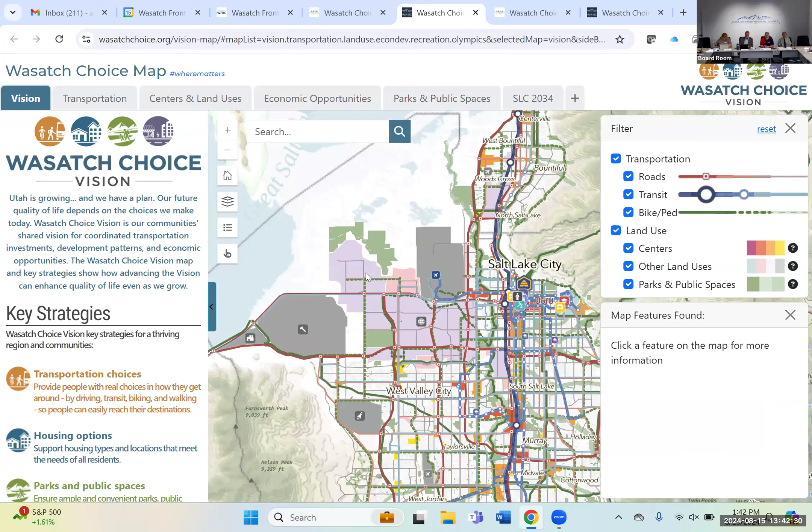But we also created this tab, the SLC 2034 tab, and now this is available for all of you to check out. If you look at this, it shows the locations of the Olympic venues all over the region—the venues in Salt Lake, those over in Park City, further north at Snow Basin, and down into Provo for the hockey arena.

The proximity of venues to our central core is narrower than really any other Olympics that's happened, as far as I'm aware. One of the reasons our region was selected for the Olympics is because we have the infrastructure largely in place to serve the Olympics when they're coming.

Now some of that is based on what we did in 2002. But the question is, what's happened since 2002 and what's going to happen between now and 2034? So what I'm going to do, and you can do this too on the map, is turn off all those transportation layers. You'll see the venues are still showing up, along with a few major developments we're anticipating in our region.

These are really important major regional developments—the Point, downtown Daybreak, the Fair Park and the Power District, the Sports and Entertainment District—that we also think about for access.

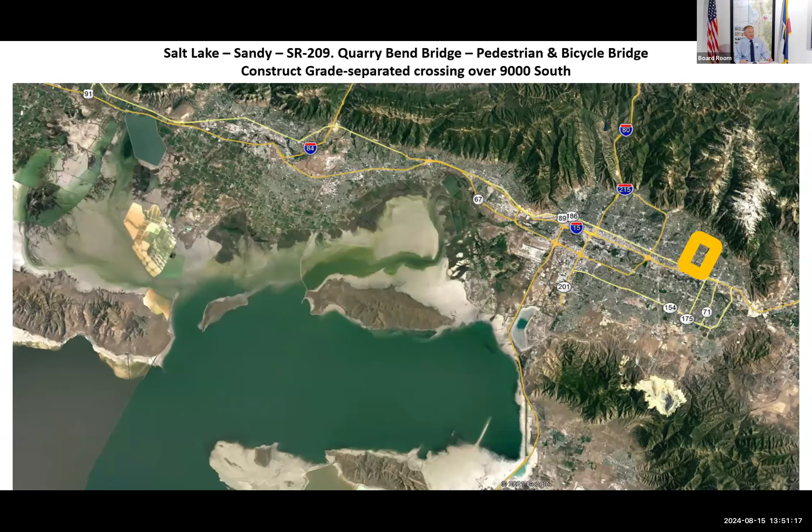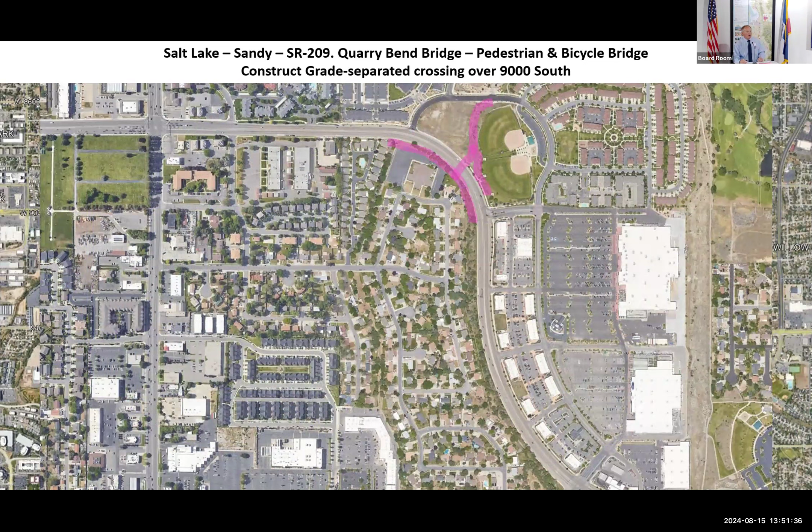So our very first project that we'll look at here is in Sandy City. This is in Salt Lake County, on SR 209 or 90th South. It takes place here at Quarry Bend, where it takes a bend right here, 90th South, over towards 9070 South. The intent is to build a pedestrian bicycle overpass or bridge over 90th South. This is a grade-separated facility—you can see it there in the dark gray.

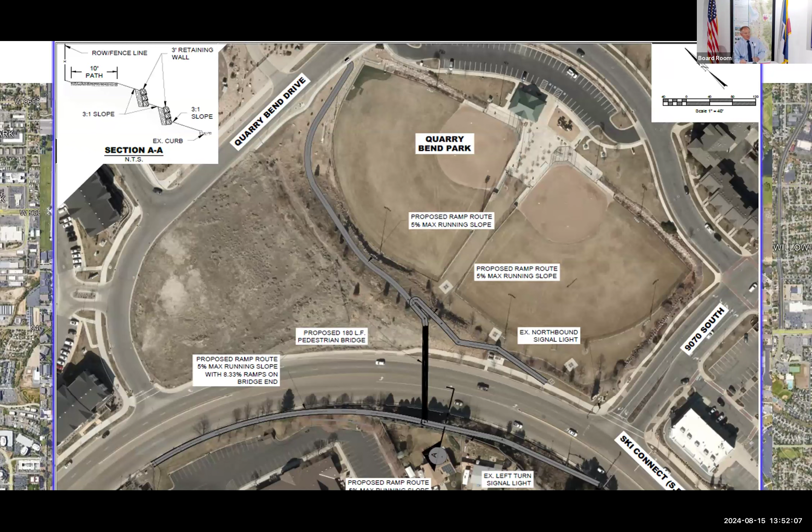What it'll do is not only construct the bridge, which is the black line, but also the sidewalks, which will enable a connection to their Sandy City Canal trail, as well as sidewalk. It'll provide access from the residents on the west to proceed across to where the recreational and shopping facilities are on the east. You can see the grade elevation between the west and east side there.

The structure is fairly simple to implement, but the intent of this board modification is to add additional funds. There were some active transportation investment funds that were programmed by the department on this project.

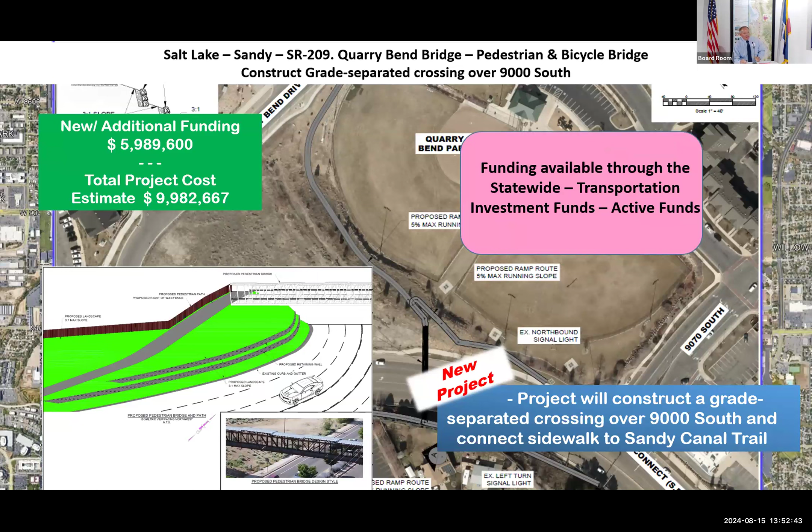This amount was for $5.98+ million, giving us a total project cost of $9.9 million for this project. The next project we have an opportunity to look at is just south of the Capitol, on Capitol Hill at 300 North and State Street. This is to address an intersection there, realigning an existing at-grade intersection into a roundabout at 300 North and State Street. Perhaps this is the view you're more familiar with. The construction of a roundabout in this area will reduce congestion and help increase safety and mobility throughout the area. There was some funding put into the design, $300,000. An additional $2.2+ million is being requested to add to this project so it can go to construction.

The next project we have before us is also in Salt Lake City.

On the last one, does that mean we lose the possibility of death during the legislative session if they build this? Because that's the most dangerous intersection in the world to get through, and you have to have a lot of courage. You mean it's going to solve that issue?

I would defer back to UDOT. I think it's a good thing—it'll minimize the speeds and the intersection organization, I think. Ben, anything you'd add? Coming up out of the avenues onto Beck Street may be as bad as that one. I know that they've done a lot of coordination. It just shows you should not try to go to the Capitol during the legislative session.

I know that they've done a lot of coordination in that area, and I think one of the things they're also looking at with this project is they've had issues with people trying to get photographs and stepping out into the roadway to get the right photograph. Part of this creates a little bit of extra room to allow for those activities to happen off the roadway, so that's also part of it.

Our next project is a project in Cottonwood Heights. This is a request from Cottonwood Heights, at the Bengal Boulevard and Highland Drive area. It's an intersection improvement in this particular location. You'll recall, hopefully, that a few years ago we had this project brought before this body for review and approval. This was to address the intersection at Highland Drive and Bengal Boulevard, both the turning movements to the north and to the south.

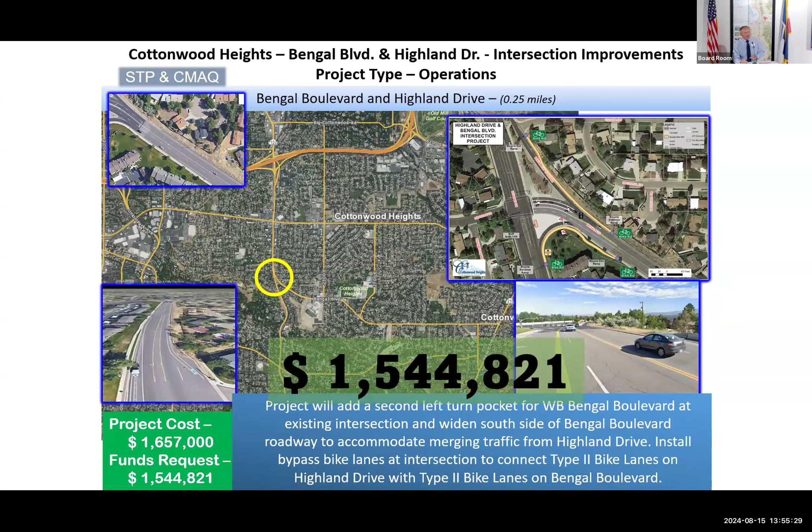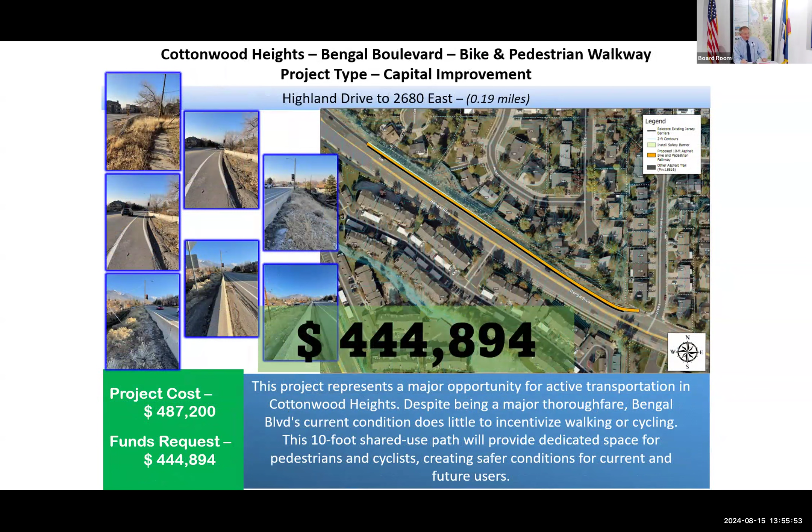A couple of years ago, the funds recommended by this body were $1.5+ million. There was also a project just a little to the north and further east on Bengal Boulevard, to construct a 10-foot bike-ped path on the north side of this facility. The intent was to tie these two projects together. It was recommended by this body and approved by the council, at $444,000.

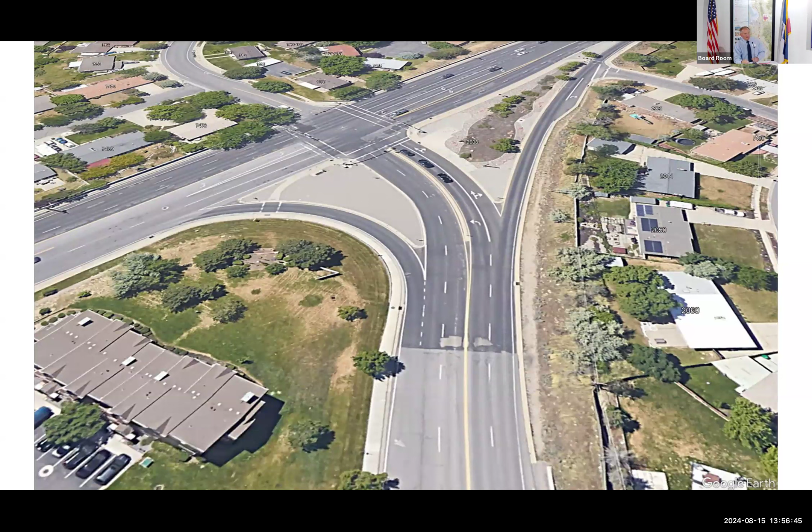But as you proceed a little further to the west, we lose all that on the north side. And as you come down to an already constricted intersection approaching Highland Drive, we have even more complications with the level of traffic volumes in the area and the pedestrian mix.

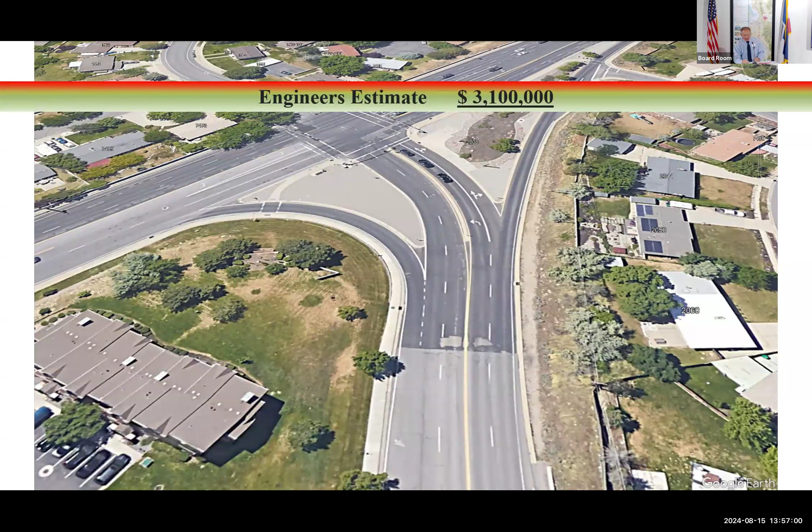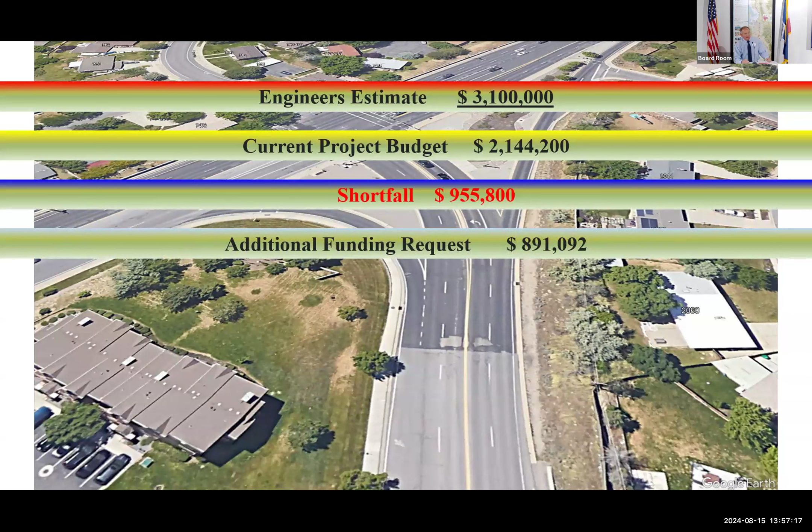As we combine these projects together, the engineers, having gone through 30% design, have identified that this project is now a $3.1 million project. Our funding currently budgeted or programmed for is $2.1+ million, giving us just under a $1 million shortfall. The city has come back and requested an additional $891,000+, coming to the table with their match, as well as a commitment to provide all other resources and additional funding if necessary to complete the project.

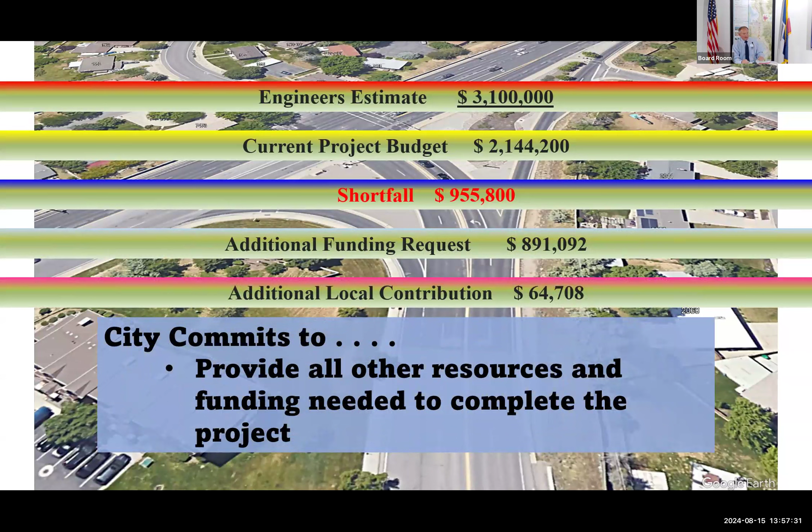So this board request is for an additional $891,000 of STP funds.

The next project brings us the list of Transit Transportation Investment Fund first last mile projects. This is a funding source for active transportation projects, to help address transit use, either from home, work, or other locations.

As the Transportation Commission, UDOT has a prioritization process for these projects. And when a project is identified, it requires that the project sponsor come to the table with at least 30% match on the project funds.

These projects were reviewed over this past 6 months, in March and May, and then were approved by the Transportation Commission. These projects here are projects that are in the WFRC area.

That's pretty good. So that gives us a total amount of projects in the Wasatch Front area out of 13 projects, 12 of those projects are in the Wasatch Front area. The total funds that were programmed with the match equated to more than $22 million for all 13 projects.

The TTIF first last mile projects equated to $4.7 million. In the Wasatch Front area, the total amount of the projects was $21+ million on 12 projects, with the TTIF first last mile at $4.4 million.

So the request is to add these projects into the Transportation Improvement Program. That brings us to table number 2.

So the first projects in that table are projects from our federal government. These are grants for community project funding, or CPF projects. They were formerly known as earmark projects.

These projects are appropriated and allocated from the general funds for transportation and infrastructure, and the grants are based on the recipients, and their allocations are determined by Congress through a congressionally directed application process. The recipients are also specifically identified in the Appropriations Act corresponding with the applicable fiscal year.

Awesome, that's fantastic. So they're sending us money and telling us where to spend it. So we say, why do we need to talk about it? Well, we need to, as a body, approve these projects into the TIP.

Some of these projects also have funds that are already in the TIP. And so if we were just to add those funds to the projects that are already in the TIP, there would be some discrepancies in the amounts that are coming to the state from those that they could see and those that they couldn't see.

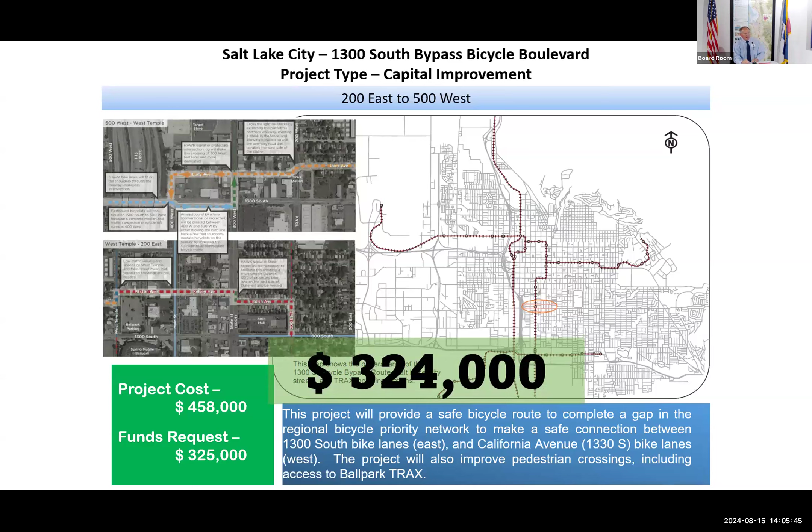It was requested that we fund the project at the time for $325,000, and Transcom recommended, and it was approved at $324,000.

In addition, a couple of years ago, Salt Lake City came and said that for phase one they would like to construct the Kensington East-West Byway, which was also a bike-ped improvement in the area of West Temple to 6th East. This body reviewed and recommended it, and at the time we had $300,000 to put towards this project, with the commitment from the city that they would secure additional funds from another source.

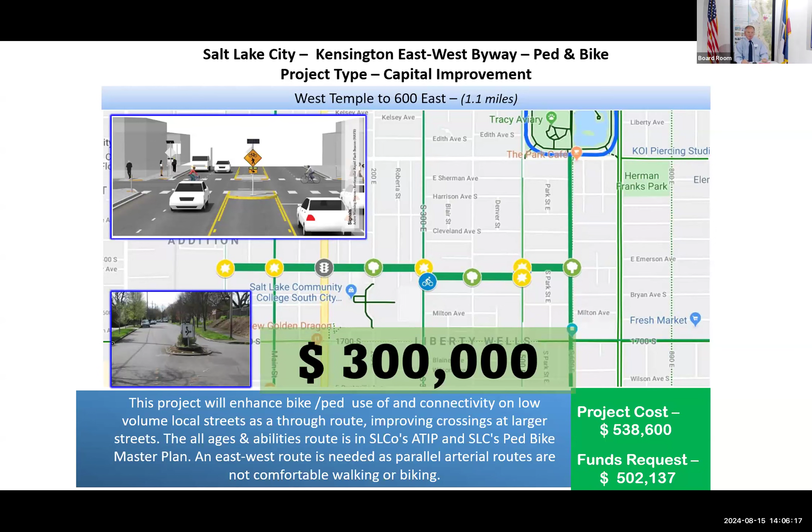The following year, they came and requested phase two of this project, again the Kensington East-West Byway, improving and enhancing the bike-ped facilities throughout the communities on lower volume roads. The requested amount was $410,000, and Transcom reviewed and approved $350,000 for this project.

So these three projects were out and going. There were parts that were done on the 13th South project—the very first one we did—that were outside of the federal project. They were able to accomplish some tasks with UTA and in-house that didn't require any federal action or oversight.

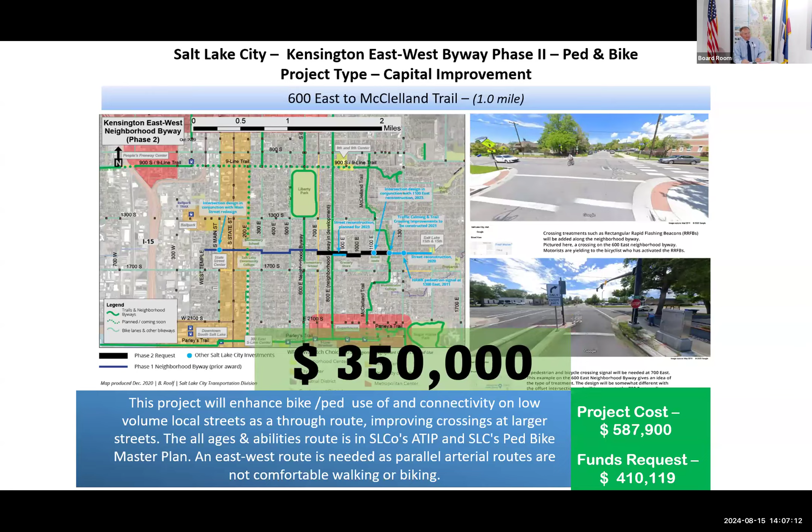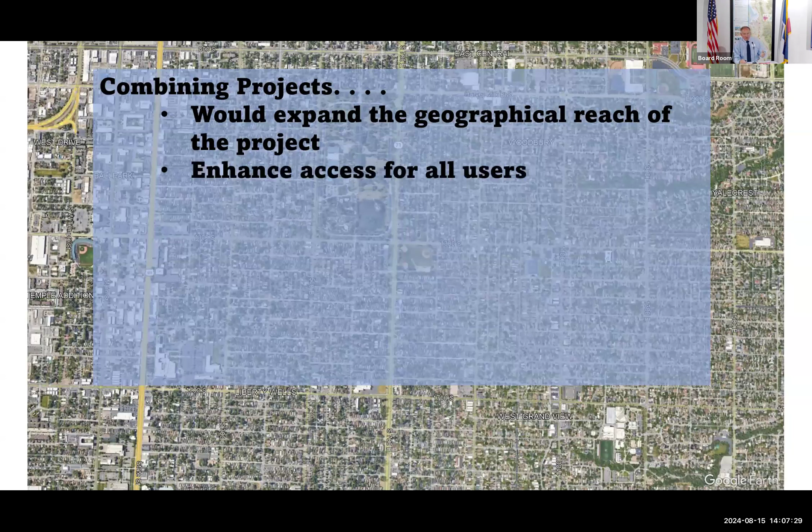So the request now, after counseling and working with the city, is to combine all three projects together, combining all their funding to make an improvement. This would expand the geographical reach of the project and enhance access for all users, especially bike and pedestrian users. It would add key bicycle infrastructure along 13th South, Kensington, and Andrew Avenue.

It would include critical intersection safety improvements on Main Street, State Street, and 300 East, and implement traffic calming as well as signing, striping, and pavement markings. If we add those three projects up, the total amount would be a little more than $1 million. The request is to combine those projects, expand the scope, and dovetail the improvements together to get the most out of the funds available.

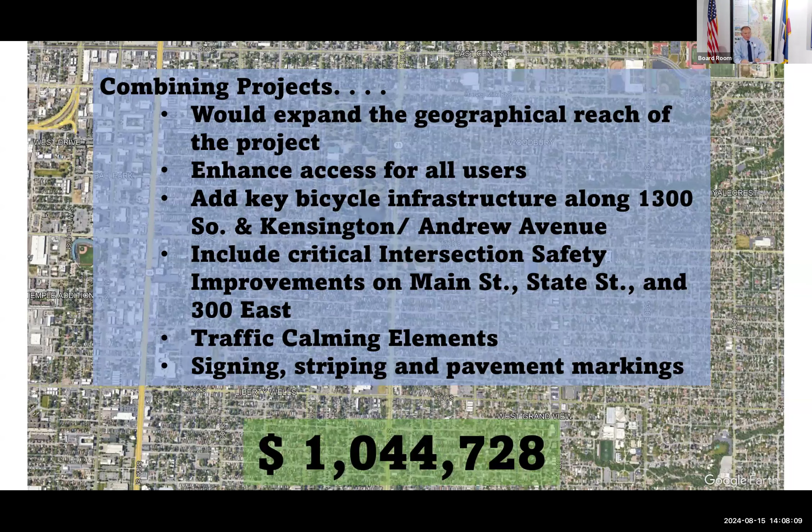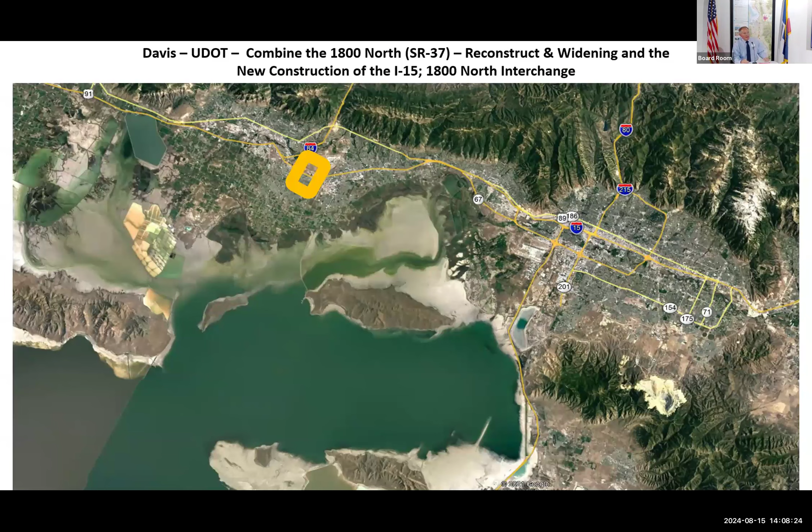That brings us to the third sheet. The first project here is on UDOT—this is the combination of 1800 North and the new construction of an interchange on I-15 at 1800 North, in this location right there.

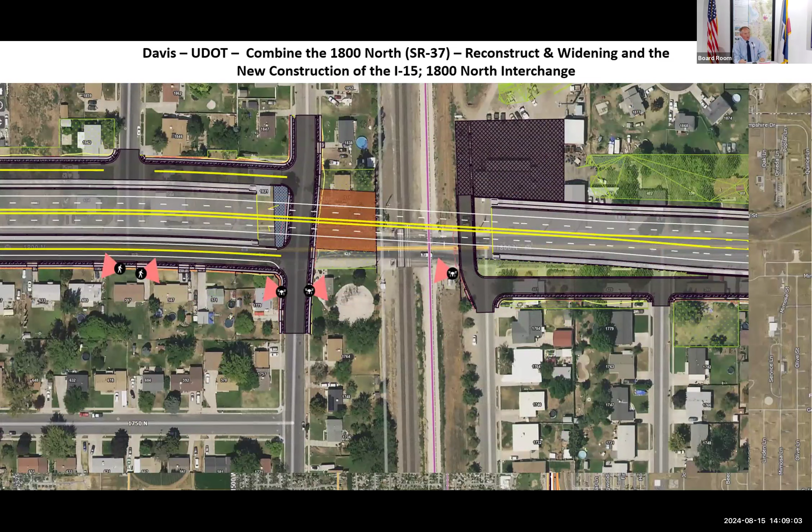The intent of this project is, on 1800 North, to take this facility—let me zoom back just a second—which is a two-lane section of road through this area with an at-grade railroad crossing, and construct a five-lane facility, including a bridge over the rail tracks. That would require additional frontage roads and improvements along the facility and corridor.

You can see also improvements up to the 1900 West intersection there.

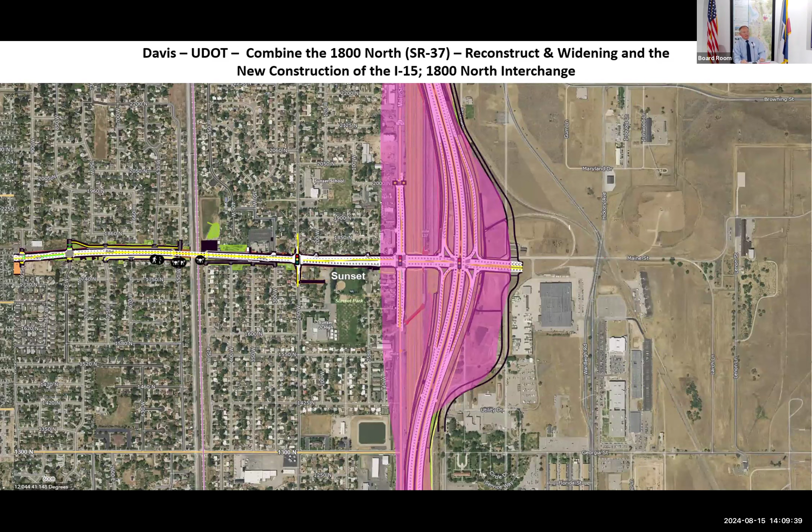On the freeway side, it would take the interchange and construct a new interchange, but push I-15 to the east onto property currently owned by Hill Air Force Base. UDOT and Hill Air Force Base are in discussions right now. Preliminary work has been done, the rail that was there has been removed, with the intent of purchasing that land. With this particular structure, you can see the intricacies involved.

That by itself looks amazing, doesn't it? This particular project will also include trail systems through Clinton, through Sunset, and along Hillfield Road. Maybe you've heard of 3-Gate Trail, improvements along those are also included in this project.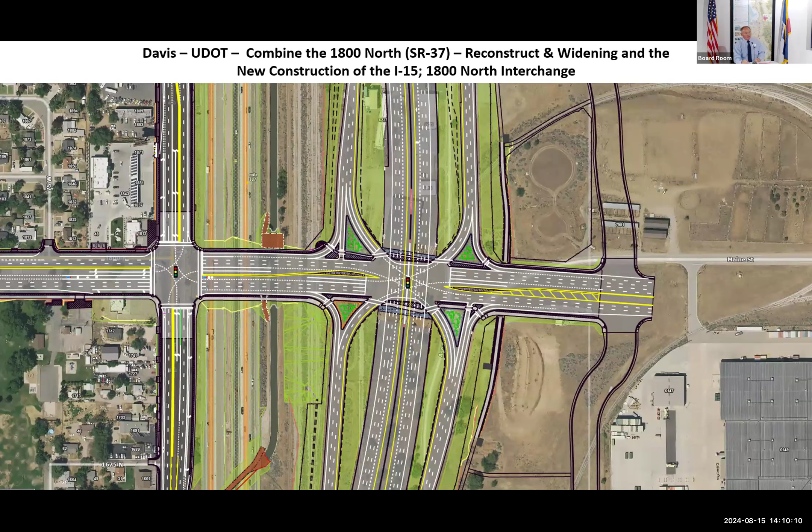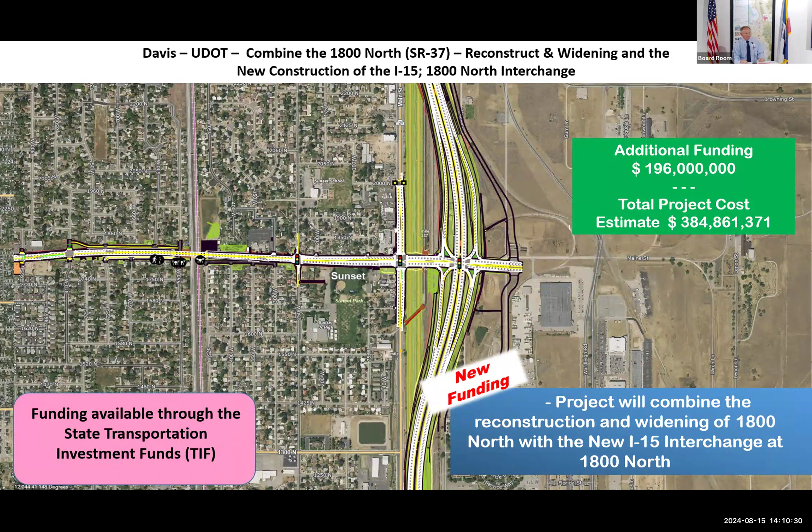The intent is to tie these two projects together, bringing additional funds to the project. We're bringing an additional $196 million, giving us a total estimated project cost of a little more than $384 million. The next project we'll look at is on I-15 Shepard Lane interchange and pedestrian overpass.

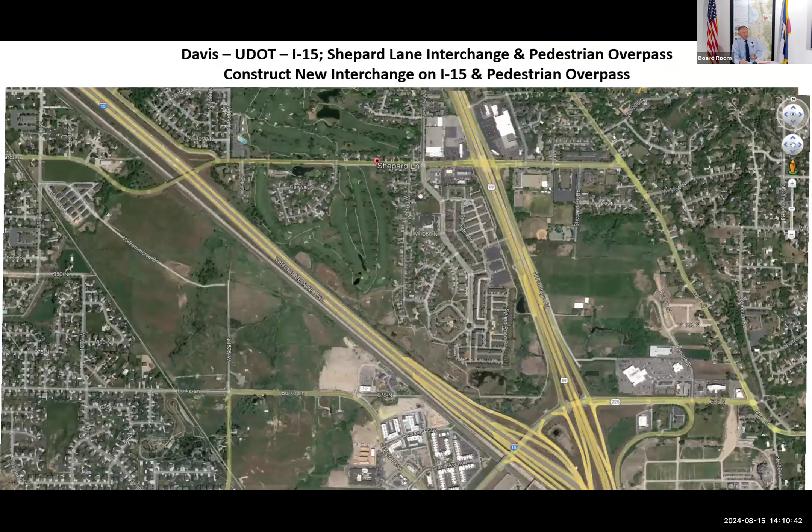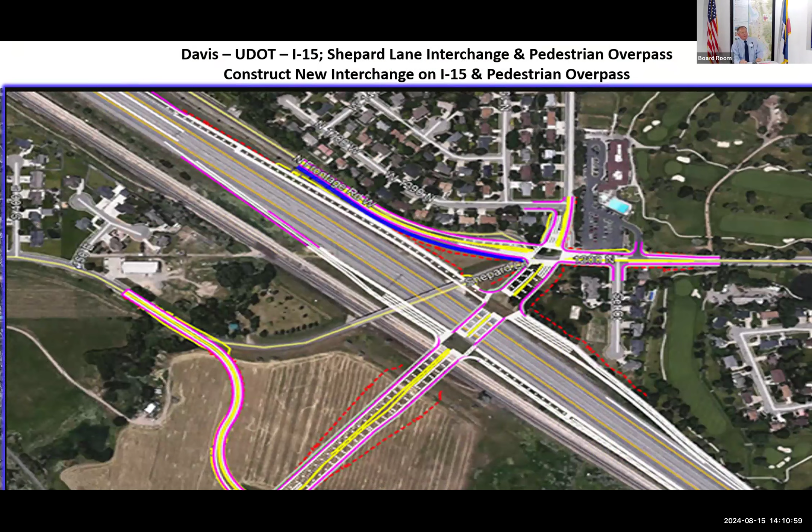We've looked at this project a couple of times. This will construct a new interchange and address a pedestrian overpass here at the Park Lane area. The new interchange is Shepard Lane, and it will tie in the interchange of I-15 as well as the West Davis Highway a little further to the west, plus the pedestrian improvements over I-15 on Park Lane.

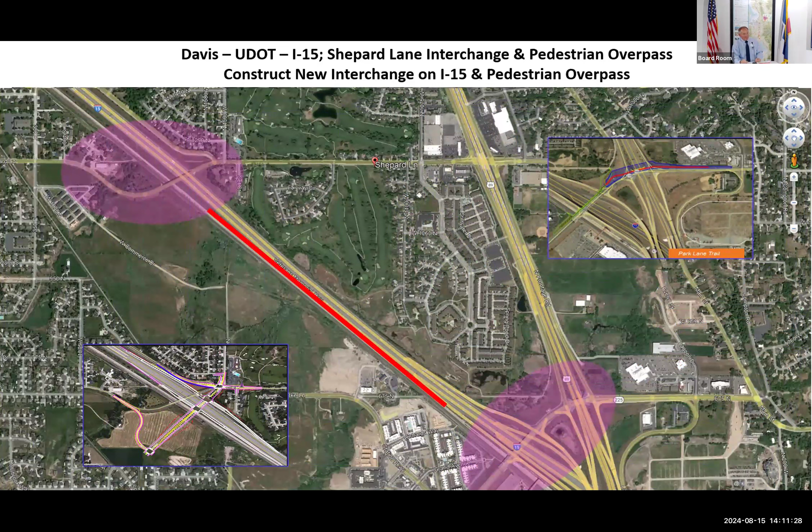What this project needs to do is construct a wall through this area. This wall will enable expansion to double tracking in the future for the commuter rail, as well as expansions to I-15. If they're able to tie this into the project, it'll save a substantial amount of money and reduce impacts on motorists in the future.

So it's for additional funding to increase the cost to accommodate the widening of I-15 and FrontRunner by increasing the right-of-way. It's an additional $3.6 million to do this now rather than address it later, which would cost more and impact a lot more.

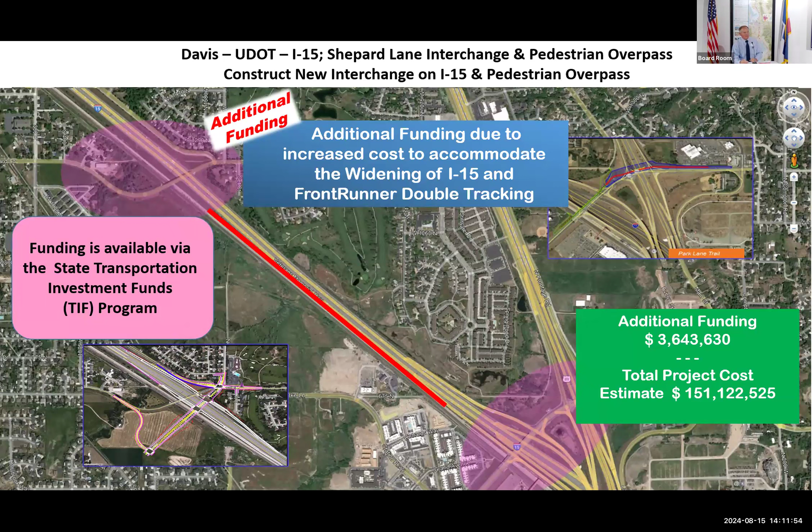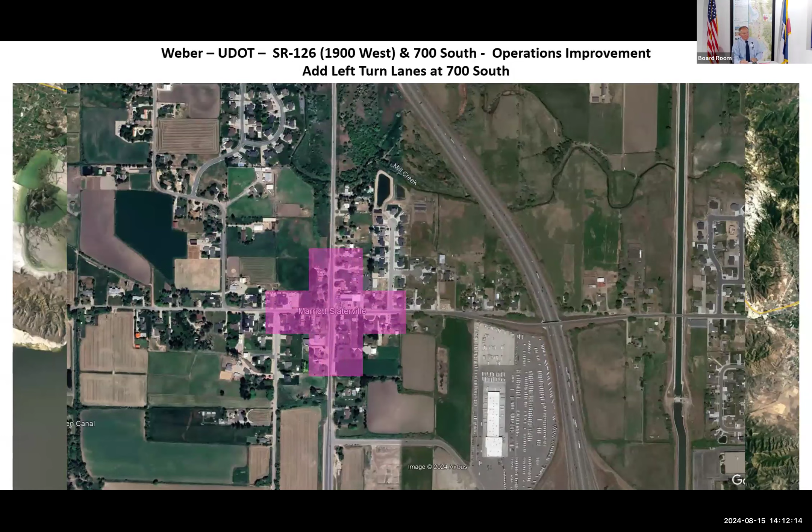The next project is on SR 126, or 1900 West. This is a project up in Weber County. It will address the intersection at 700 South on 1900 West or SR 126. If we look at the grade, you can see that anyone making a left turn totally blocks the road unless someone goes around and passes in the right lane, causing significant safety concerns.

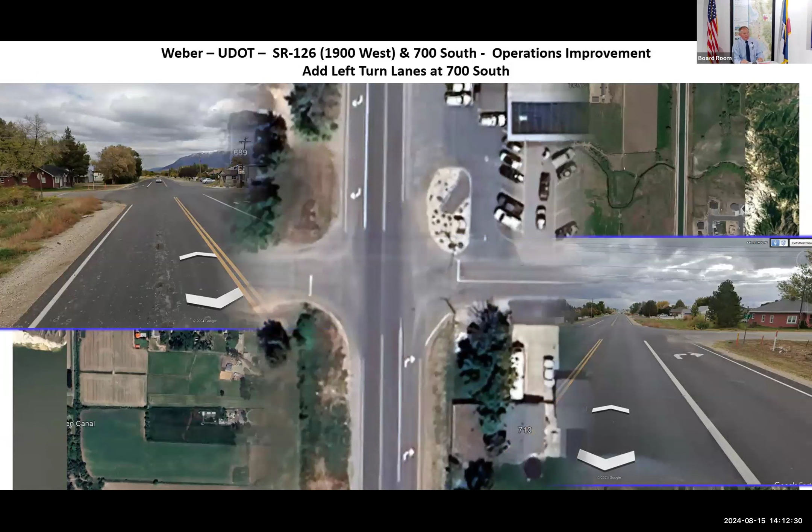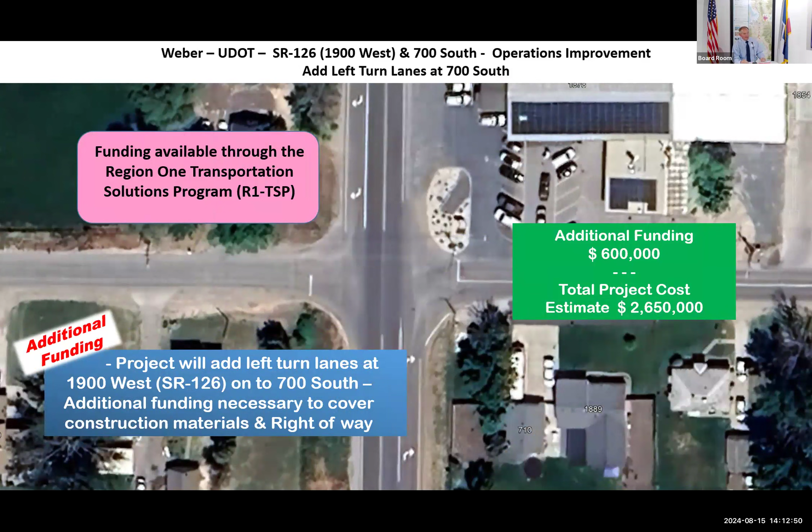The idea is to address this by putting in left turn lanes from 126 onto 7th South, both northbound and southbound. This would be an improvement costing $600,000, giving us a total project cost of $2.6+ million.

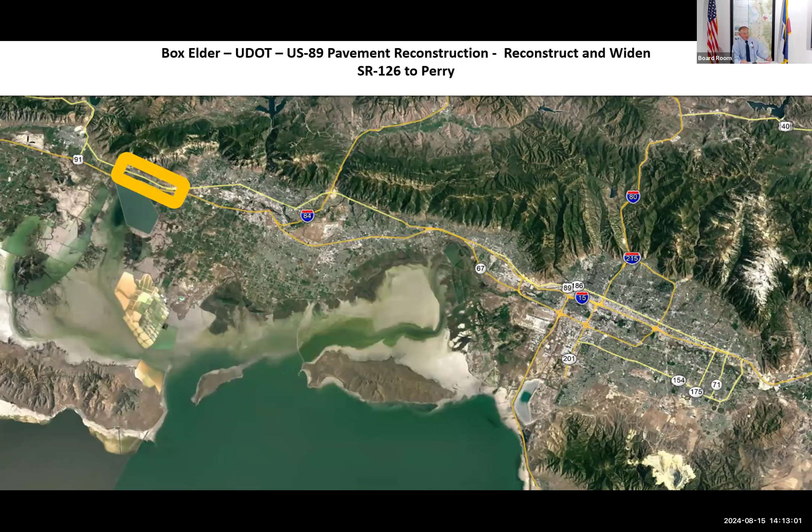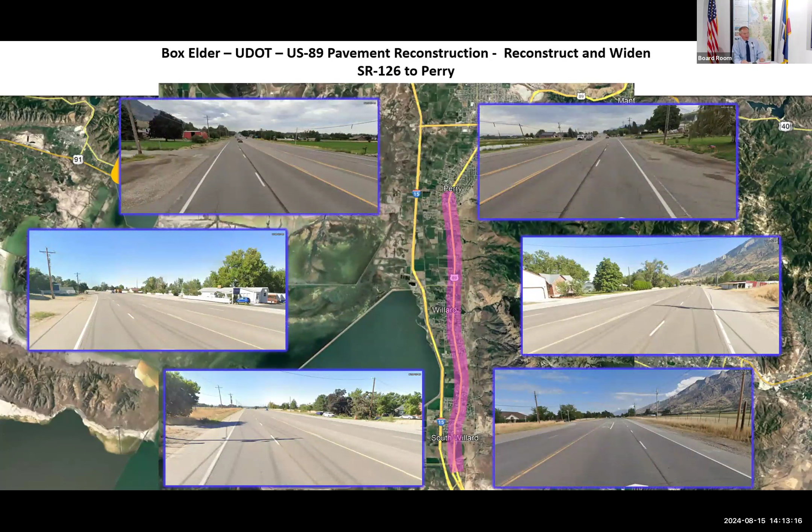The next project is in Box Elder County, on US 89. It's a pavement reconstruction project going from 126 up to Perry. This is to improve the facility by widening and reconstructing, as well as addressing drainage issues to keep water off the pavement. The request is to add additional funds of $4 million, giving a total project cost of $58 million.

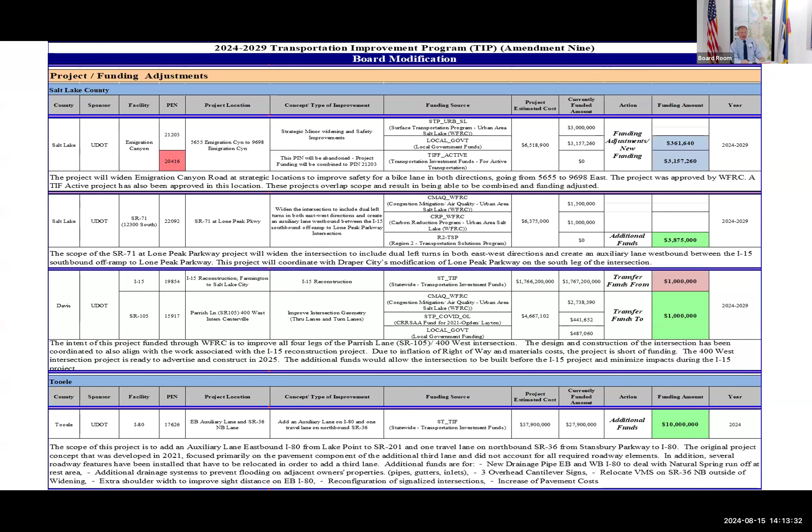That brings us to the last sheet. I can play these all in backwards if you want afterwards. I don't know, we can try it.

The first project here is in Emigration Canyon. Mayor, good to have you here. This is an exciting project in Emigration Canyon for some safety improvements between 5655 East and 9698 East. That particular location is right here on the map.

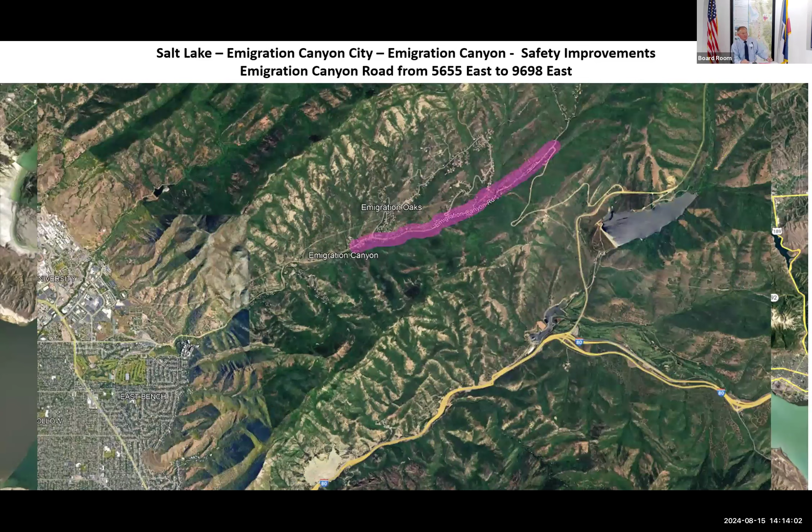Looking at the pictures going up the canyon, it's a beautiful area to live and recreate, but there are a lot of safety issues for anyone on a bicycle. You can see the narrowness in many places. The intent of this project is to strategically widen both sides so we have bike lanes on both sides of the facility up through the canyon between these points.

There was a study done on Emigration Canyon that prioritized locations as well as improvement types. The city has been working on slope mitigations as well as retaining rock or maintaining the clearing of the facilities from rock fall and other debris. This particular project will address safety issues, which will help with some of that mitigation. Anything you would add here, Mayor?

What this project is going to do is take funds that are being programmed from UDOT on the TTIF active program, about $3+ million. The local match, I wanted to highlight that.

That's a lot for Emigration Canyon City. But we have a total project estimated cost of $6.5+ million, and those other funds are coming from Wasatch Front in the STP funds.

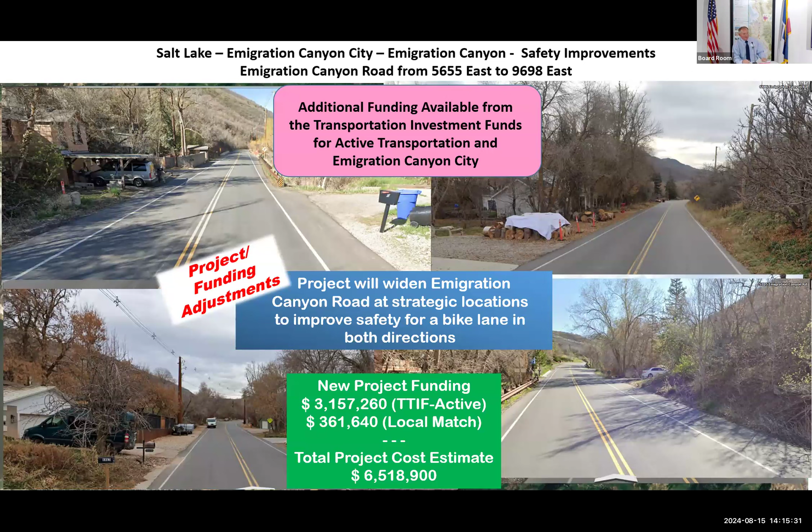The next project is on 123rd South, or SR 71. This is to address the traffic coming on 123. If you exit off the southbound lanes and come up to that first intersection, that intersection is Lone Peak. There's significant backup all the way onto the freeway, sometimes on this ramp.

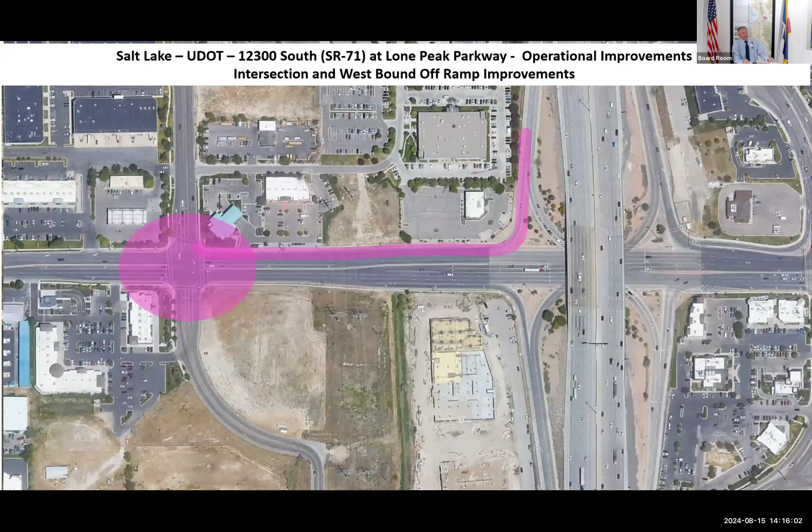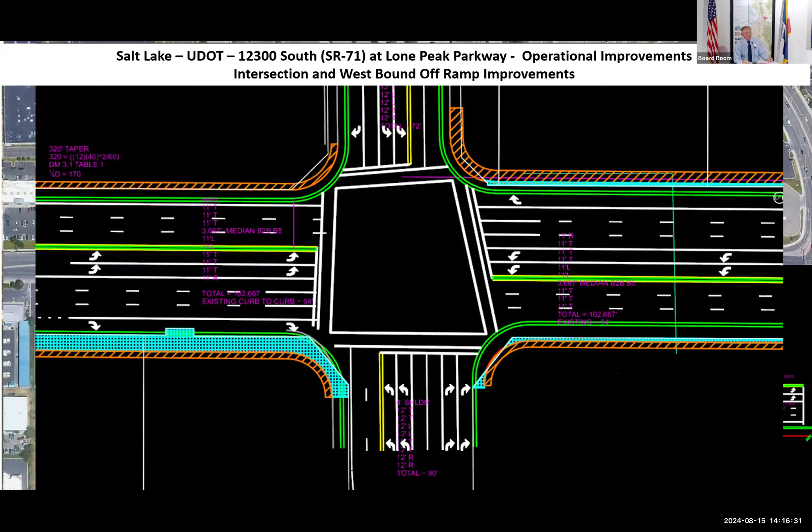The intent is to first build an auxiliary lane, or a dedicated right lane, that'll come from the ramp all the way to the intersection at Lone Peak. The other piece is to address the intersection by creating dual lefts, both eastbound and westbound on this facility, and widen the intersection. This will be done in conjunction with improvements Draper City is doing on Lone Peak Parkway with funds approved by Transcom.

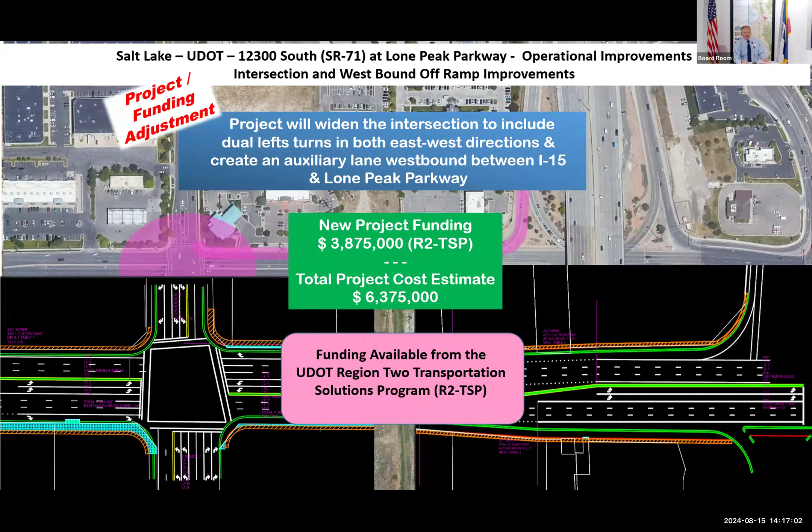The intent of this request is to tie these projects together, bringing an additional $3.8 million from Region 2. This is from their Transportation Solutions Program funds, giving us a total project cost estimate of $6.3+ million. The remaining funds are programmed from WFRC. You approve those funds and they're in as part of the draft TIP at this time.

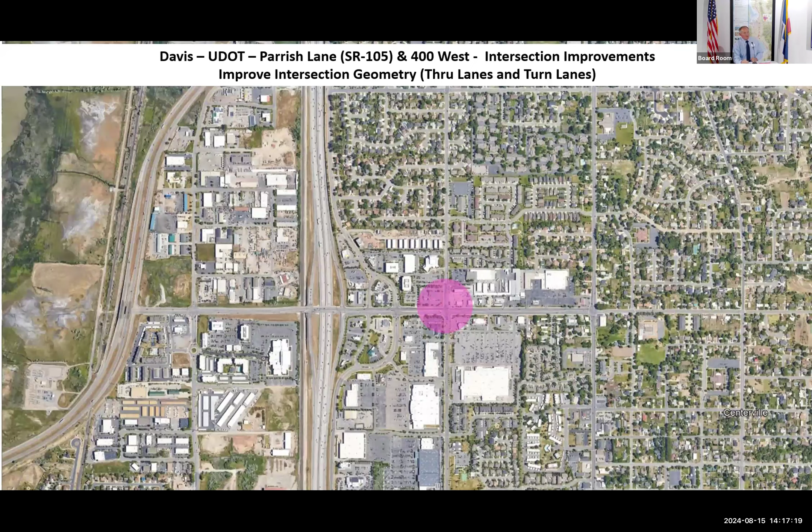The next project is in Centerville, on Parrish Lane, or SR 105, at 400 West. This is a project that this body also reviewed and approved back. There are two intersections: 400 West, and then just a block west there's Market Street. Both of those projects were approved.

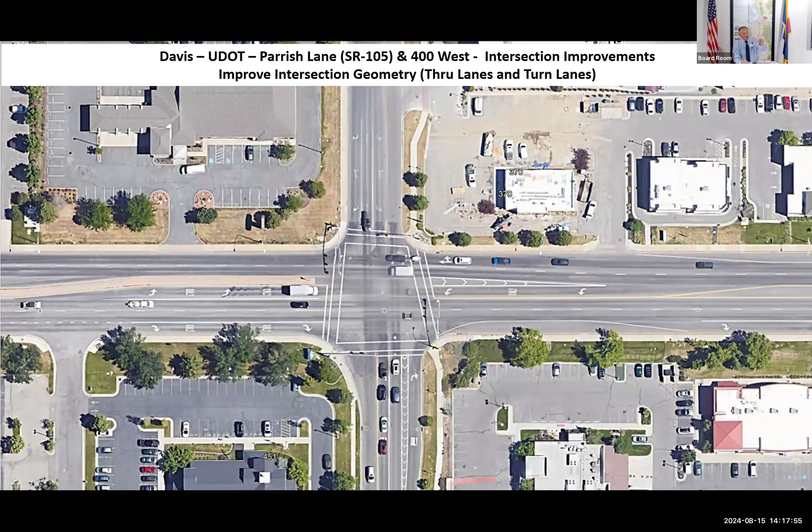However, these intersections are being addressed with the improvements of I-15. In planning and programming, it was identified that this project, with the federal funds we have programmed, could be advanced and move forward first without federalizing the I-15 project. So our funding all got moved to this intersection at 400 West, making these proposed improvements, but they're still a little short so that this project can advertise. So UDOT is moving $1 million from the I-15 TIF funds into this intersection so it can be constructed and completed before the I-15 project begins. This has a total estimated cost of $4+ million.

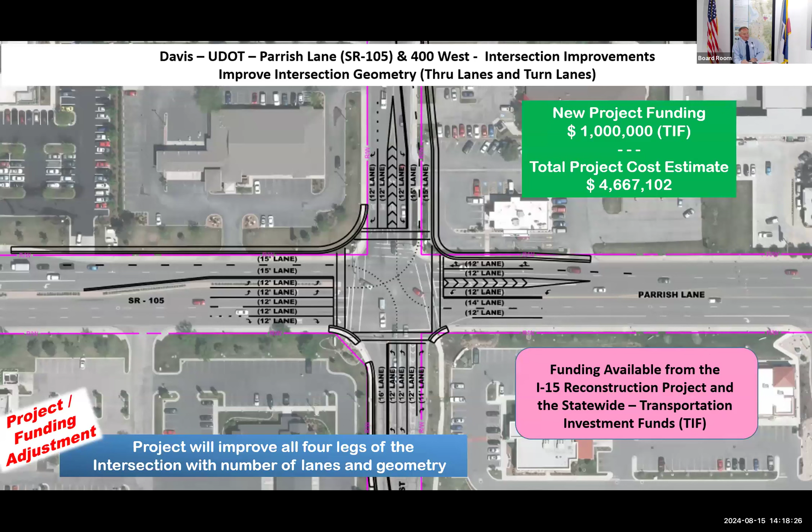Then we have a project out in Tooele, and this is the last one on this board mod, just in case you want to talk or have us do it again. This particular project does two things: one, it's an eastbound auxiliary lane on I-80, and a northbound lane on SR 36.

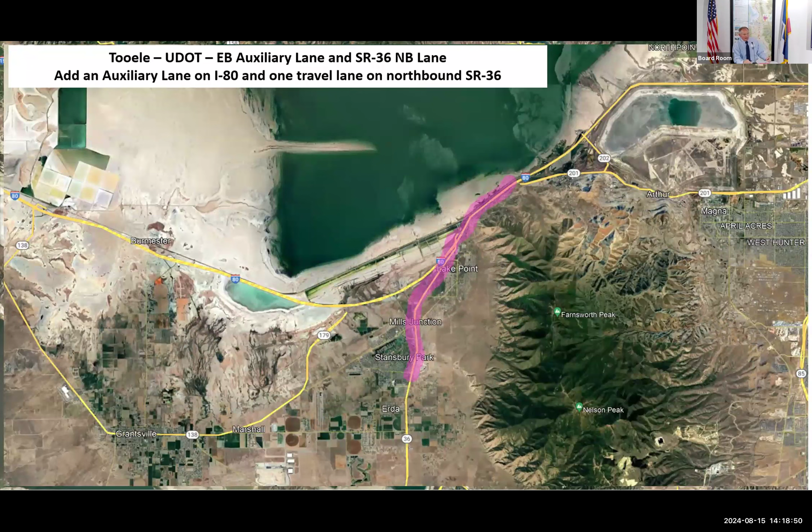The intent here on I-80 is to construct an auxiliary lane from where you come on 36 onto I-80 all the way up to where SR 201 is. In that little picture, you can see where 36 comes onto I-80. You've got that shoulder as it merges in, and then it merges down to just two lanes. The intention is to maintain that all the way up to SR 201.

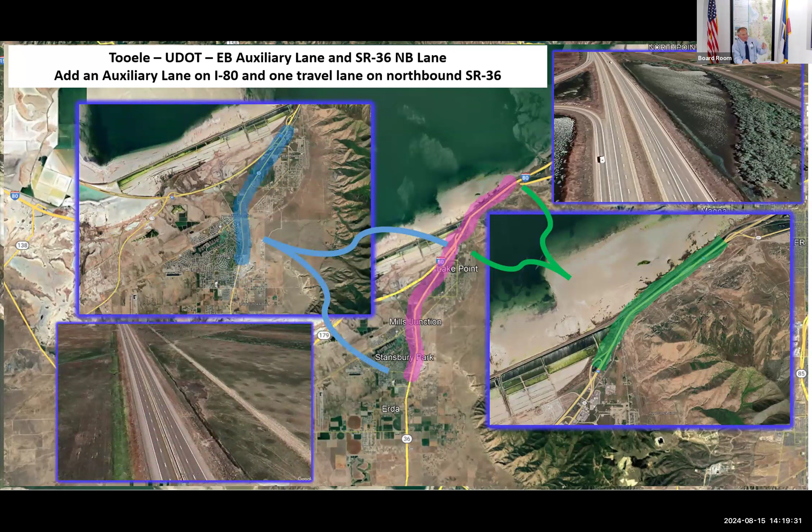The portion here on SR 36 is to address the northbound lane. Currently it's a narrow two-lane facility. The new project will add an additional northbound lane on 36, which will tie right into I-80 with an auxiliary lane, so you can go clear to SR 201 without weaving onto the main line of I-80.

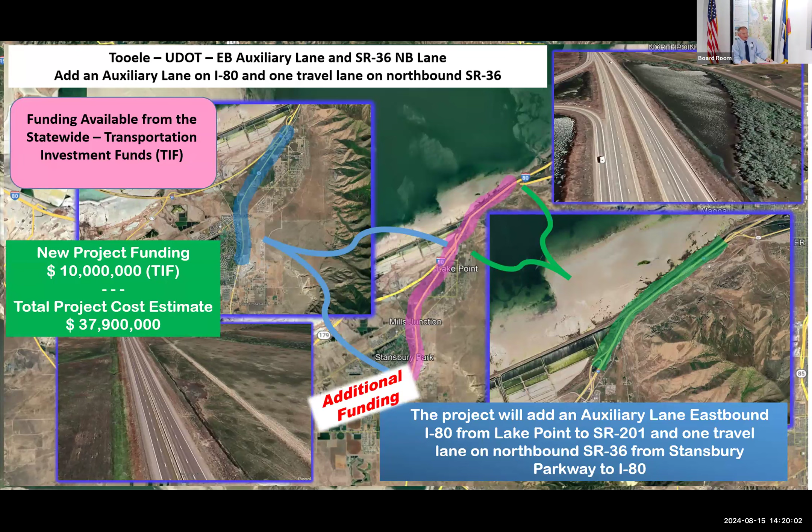They're adding $10 million for a total project estimated cost of $37.9 million. Mr. Chair, that's all our board mod.

Thank you, Ben. That was a lot. We can go back. Any questions for Ben? We could go back four pages and...

More of a comment, and I think this comes with our partnership with UDOT as they are working on our strategic double tracking, but a couple of those projects, you see the synergies with road projects that are needed and elimination of at-grade crossings, those kinds of things. Those opportunities, if we're working closely together, make it an obvious choice to do when you're doing this other work, and ultimately it improves the system. So I applaud their group, and I know they're working closely with our engineers and figuring out those opportunities. It's a good thing.

Thank you, Carlton. Any other comments or questions for Ben? I'm going to briefly take Carlton's point and generalize it to the collaboration that exists between UTA, UDOT, WFRC, the cities, and the counties. As Ben was going through this, if you were listening, some of the projects were like, well, this was going to happen, but we worked with UDOT, we adjusted this, and then we worked with the city and they did this. That happens day in, day out. That's the life that Ben lives, working with the teams, working with FHWA, also Rex.

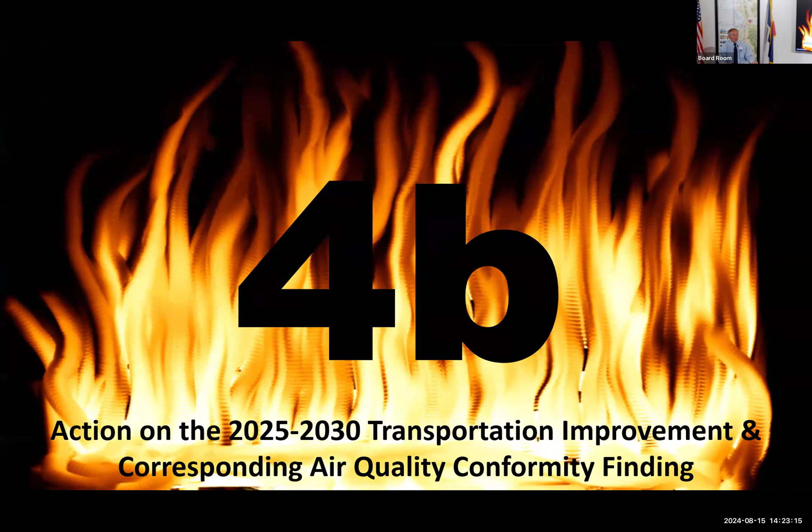Ben, we'll turn it back to you for the 2025-2030. Thank you. This is one hot item. Now, this is one of my favorites here when we get to talk about item 4B. So today we're going to take action on the 2025-2030 Transportation Improvement Program and the corresponding air quality conformity finding.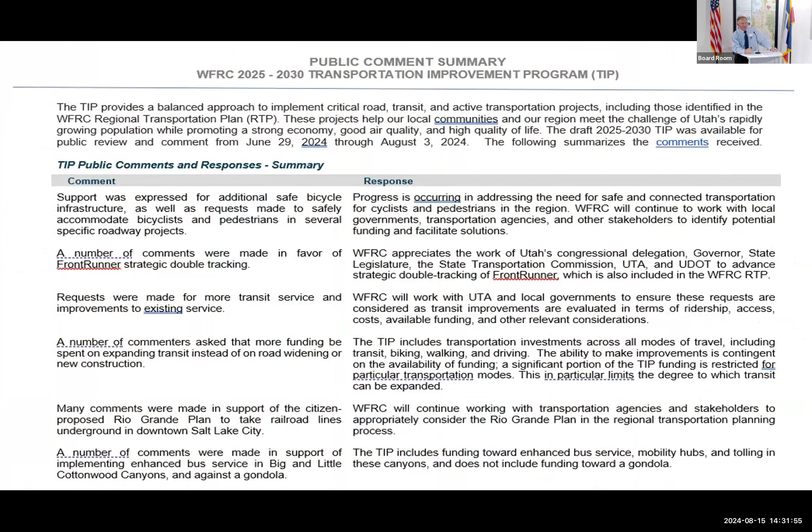In your meeting materials is a summary of those comments that were received. This is just a real brief comment summary. You can see to the left there is the comment and then the response. You also have in the meeting materials a list of all the comments.

It is our intention, and Wayne leads this up in our office, to respond to every one of these comments. It's going to take us a couple of weeks, maybe 3 or 4 weeks. We'll respond to all of the comments and make those available for you as well as the public to review. But we also take this information and use it with our partners.

So the local governments, we meet with the local governments. UDOT, UTA, we meet with them. In fact, UTA and UDOT help us in the response to these. When we get a question on a project, they're helping us prepare the responses for the project.

When does this happen? Why is this not going on? And where are we at? So we take this information in, and after we get all the responses put together, we keep this as a document that we utilize when we have meetings in the regions.

Region 1 has a meeting called roadway management, and in region 2 they have a meeting called pavement management. That's the name, but they're actually coordinating project meetings where they talk about the projects and where we're getting better every year, discuss what some of the comments were, or talk specifically with the program managers and project managers about specific projects.

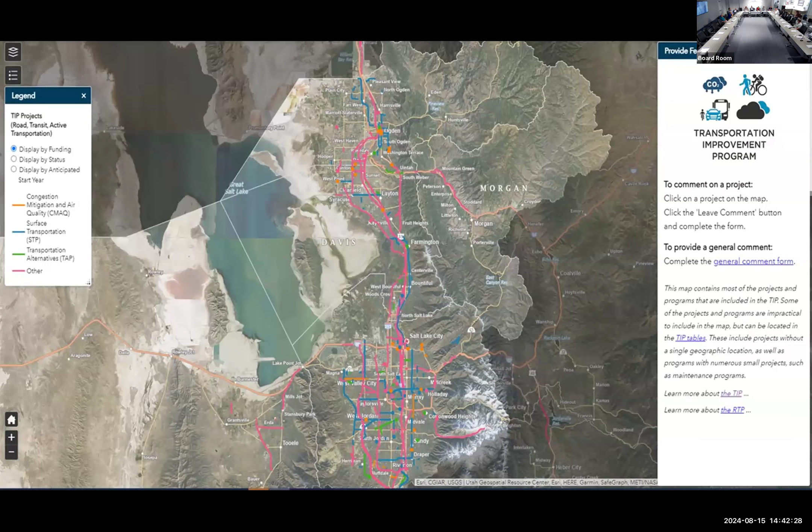VOC, volatile organic compounds, is one of those, and nitrogen oxides is another. We've done a substantial amount of work on NOx reduction in connection with trying to get our PM 2.5 SIP and get our state into more conformity status on that. We've done a pretty good job with that. We're actually asking for credit with respect to that, because the way ozone gets formed in Utah, NOx is a huge component. We don't know if EPA will take a look at it this way, but what we're trying to do is essentially piggyback our ozone reduction on what we've already done with PM 2.5.

Because when you get right down to it, we're really up against a barrier in terms of reducing the man-made stuff - we've done a pretty good job with that, there's only a little bit left we can do. A lot of the problem is caused by stuff that gets imported. Some people talk about China, but I'm talking about California, forest fires, and things like that that we don't have control over and will never be able to fix, as well as organic stuff produced by trees and things like that in our environment. So anyway, we're taking a shot at it.

Mayor, just to put a number to that, over 80% of the ozone precursors are so-called background ozone, meaning it's not man-made from Utah. So we have control - our human-caused ozone precursors are less than 20% of what's contributing to ozone.

And that condition is unique to the Intermountain West. We have the highest levels of background ozone of anywhere in the country. So it's a daunting challenge.

This gets in the weeds real quickly, but anyway, what we're arguing to EPA is, we're not trying to slouch on our responsibilities and to do what we possibly can to improve our air quality. However, these unique challenges make it a lot more difficult for us than it might be in some other locality.